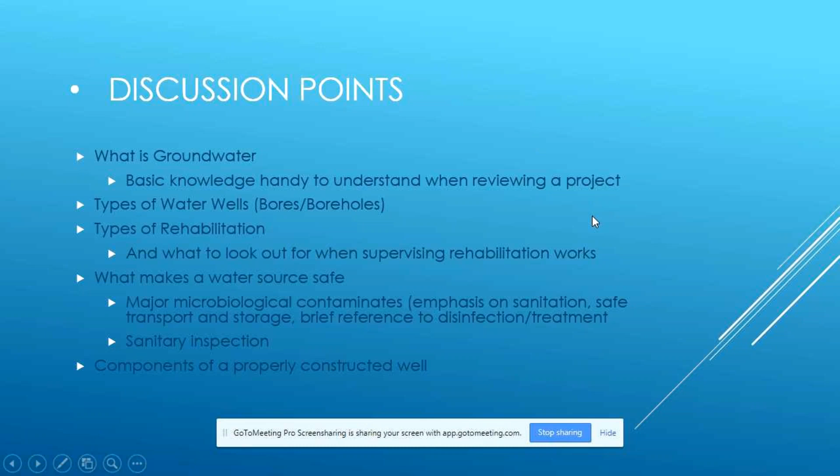Ooh, someone's microphone is on. Emily, should I still continue with that noise? Yes, please continue. Okay, all right. Sorry about that.

What is groundwater? Groundwater is a body of water that is found underground within the earth, in the cracks and spaces in the soil, sand, and rocks. Groundwater is stored in and moves slowly through porous soil, sand, and rocks called aquifers. An aquifer is typically made up of gravel, sand, sandstone, or fractured rocks.

The water moves from the surface through the spaces that make them permeable. The speed in which the water moves and groundwater flows depends on the size of the spaces in the soils or the rocks and the connectivity of these spaces.

I may have missed out something. And with the replenishment as well, or the groundwater recharge, which can be done by the rain or melting snows that seeps from the surface of the land into the groundwater.

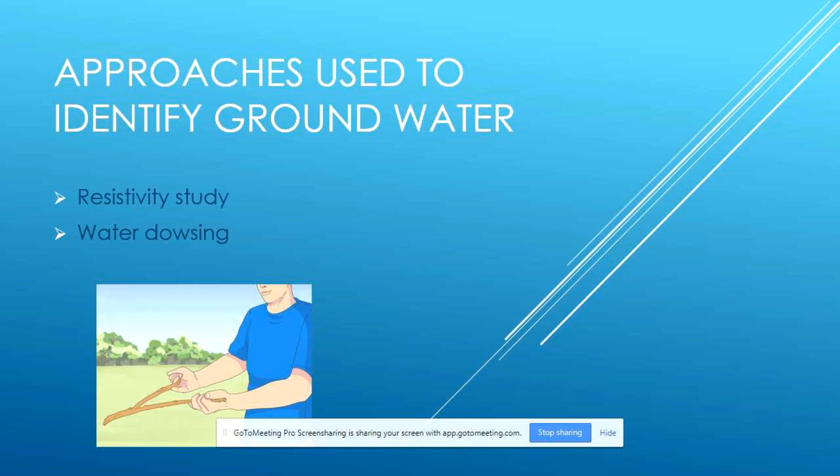And especially when we are using the resistivity study, Sahara, probably you can switch to the next slide. When we do a resistivity study, basically we will probably determine that we are going to do a tube well or a bore well, right? And through the resistivity study, we will get to know the depth of the well.

And therefore, while drilling, it's very important for us to record what type of drilling we are doing, the time and the date we finish, the overburden, the geology of the area, and the type of sand, mud, or rock that we begin to observe while drilling, because these things are very important. In Sri Lanka, all this data is sent to the National Water Board, where they keep all this data for future reference, and then they will monitor these wells during drought seasons,

how the water table drops, and if there's no proper recharge, then there'll be limitations for the hand pumps that will be installed for these wells. So therefore, a drill log is very important, especially when you are going for a tube well, because that gives you a history of that tube well. Sometimes in projects we drill and we don't have proper data or details, and then we move on, and if another project comes where you need to rehabilitate those hand pumps after so many years, then no one has the data to see the depth of the well or what yield it has. And so this data is very important when we are extracting groundwater through a tube well.

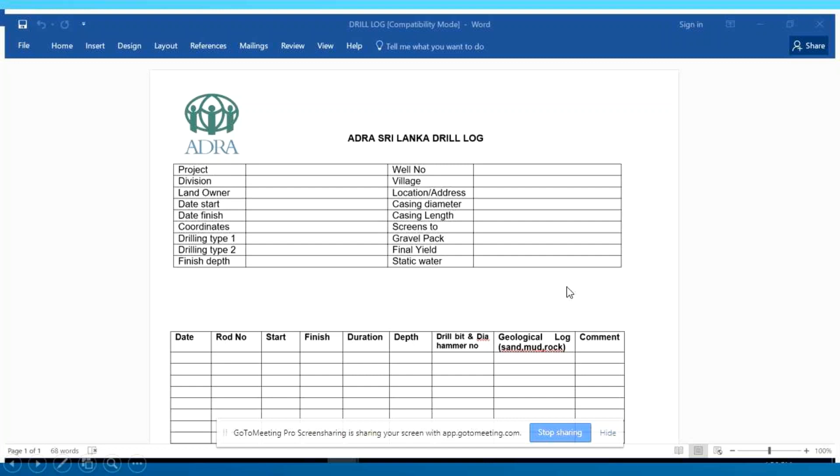Okay, there are types of water wells. First is what you find all around the world, the common dug wells, right? And most of these dug wells are not very expensive, but I know it's sometimes very tiring to do a dug well. But there is also a criteria that needs to be followed. For example, in Sri Lanka, we have a standard of between 40 to 50 feet if we are going to do a dug well, right? This is to make sure that there are no latrines or septic tanks close by, through which the water could get polluted, right?

And for this, of course, you don't need to have an electric pump, but depending on the location, situation, and your need, you can also have a centrifugal pump and an overhead tank, and it will be easy for you to use. And then the other type of wells are the driven wells.

This is where, in most places, you identify a location, and then with a very hard driven metal pole, or like in Sri Lanka, of course, we use PVC, 1000 type PVC, but I know in some other countries they use a screened or various type of GI pipes, and what they do is they hammer it into the ground until they get a reasonable amount of water, and then to extract that water, you will definitely need a pump.

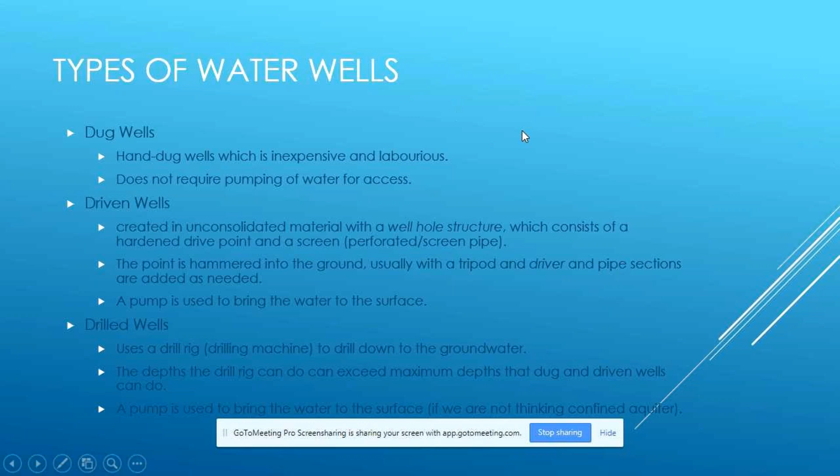In my experience here in the South Pacific, the majority of wells within the Pacific are drilled wells as well. And similarly with Sri Lanka, these drilled boreholes need to be at a certain radius from each other. It's a precautionary measure put there by the government and the departments of water, to make sure that people are not drilling bores wherever they feel like and over pumping from the same groundwater source.

With contamination of bores or wells, the well water may contain microorganisms and chemicals that will make you sick. Contaminated well water can cause nausea, diarrhea, vomiting, and potentially lead to serious health problems in the extremes, such as cancer, kidney disorders, and brain damage. Contaminants known as nitrates are especially hazardous for infants because they can disrupt oxygen flow into the blood of babies. Water quality of wells should be tested regularly for bacteria and nitrates.

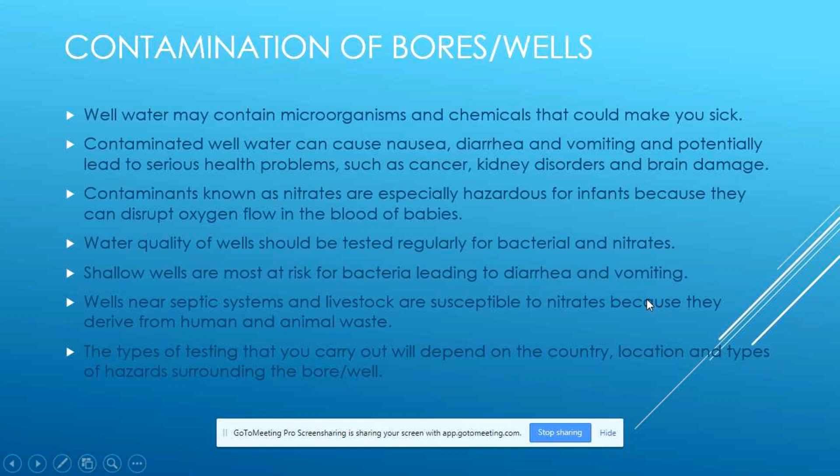And I realize different parts of the country and different countries have different time frames or frequencies in which water testing is done. So this should really be kept a close eye on to ensure that water quality testing is done on a regular basis. Shallow wells are most at risk for bacteria, leading to diarrhea and vomiting. Wells near septic systems and livestock are susceptible to nitrates because they derive from human and animal waste. And the types of testing you carry out will depend on the country, location, and types of hazards surrounding the bore and or the well.

What makes a water source safe? Now, there are various factors that contribute to making a water source safe, but we've selected 6 most important ones that we think play a vital part in this. The first one being the construction of the well or the bore, whether it be a new or a rehabilitated bore or well. This should be done properly. The location of the well, whether it's near farming areas or residential homes, toilets, septic tanks, and soak pits, and the likes of that.

The maintenance of the bore should be done on a regular basis as well, not just for the borehole, but also for its pumping mechanisms to ensure that the pumps are operating properly and at the drawing speed that they're supposed to.

The water source and the nature of the aquifer, again, avoiding the overpumping. Usually when a bore is drilled, there is a georesistivity study which measures the depth of the freshwater aquifer that we're trying to draw from the ground. And the pump testing, which is one of the primary tasks that must be done before the actual pump is put in, is very crucial in avoiding that overpumping.

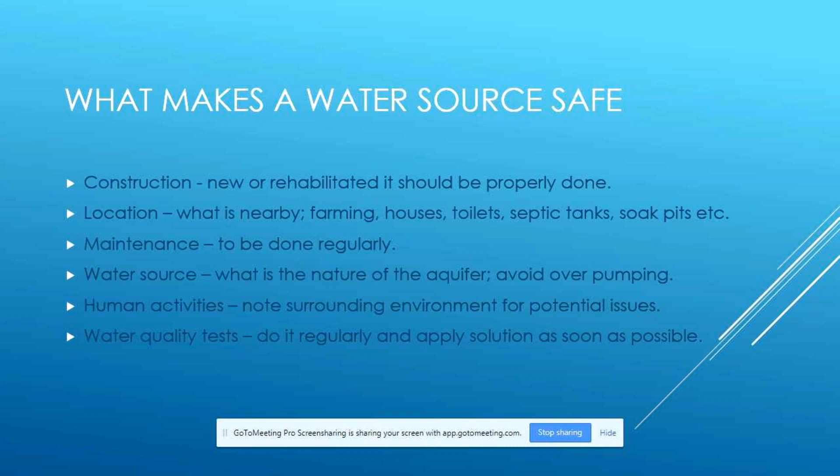Human activities: you must note your surrounding environment for potential issues. And again, with water quality tests, something to be done regularly. For disinfection of water wells, the most common disinfection for wells can be done with chlorine. I can say this especially for the South Pacific, for its bores and the quality of water. It might differ from country to country.

It's easy to do disinfection in automated boreholes, again with the chlorine, but this is probably something we can go into detail about in our next webinar, when we start to go a little bit more technical than this. The most difficult disinfection is with a hand-dug well. The quality in a hand-dug well is often very poor due to the construction of the above-ground elements and unhygienic methods of collecting water. For example, the rope and bucket that may be used to collect water are often left on the ground and exposed to disease-causing pathogens.

There is often no sanitary seal in hand-dug wells, and the construction of the above-ground parts of the well does not provide adequate protection from intrusion of surface water and dirt. Because of the large diameter of the hand-dug well, it requires much more disinfection to ensure that the water quality is up to standards. For a hand-dug well, the disinfection is a daily thing. At a minimum, the well needs to be disinfected every week or two, and disinfection needs to be performed not only on the water in the well, but also on the well casing.

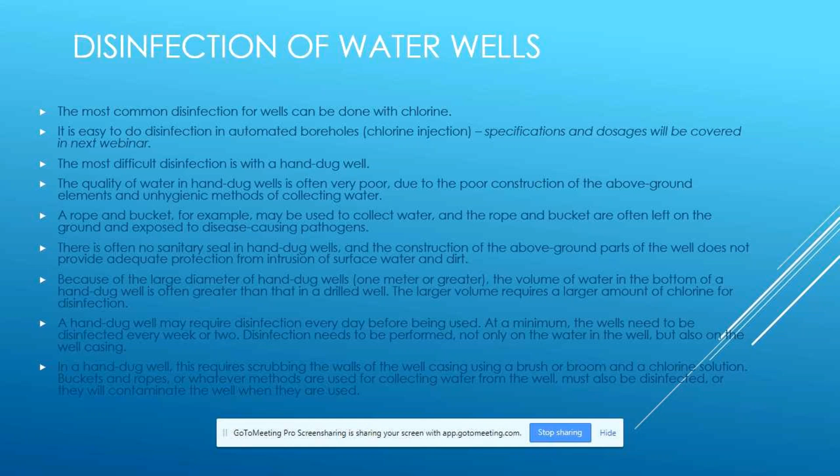Now, in a hand-dug well, this requires scrubbing the walls, the well casing, using a brush or a broom and a chlorine solution, and the buckets and ropes and whatever methods are used to collect the water. All of these things must be disinfected. So for a hand-dug well, not only is accessing groundwater very laborious, the disinfection process is quite laborious also.

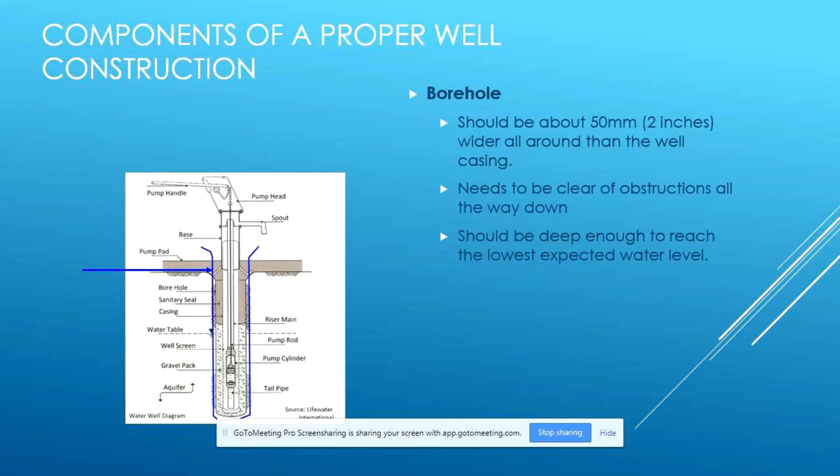Now we'll move on to components of properly constructing a water well. You'll be seeing the same diagram in the next few slides, but the difference will be the blue line that you see here, which demonstrates what I'm talking about. So borehole, for example, just looking at that blue line is what that word is referring to. The borehole should be about 50 mil or 2 inches wider all around than the well casing. This needs to be clear of obstructions all the way down. Sometimes when you're drilling, that's not necessarily the case, but again, something a bit more technical that we can cover in the next webinar. And a borehole should be deep enough to reach the lowest expected water level.

The casing, as you see, the line is now moving a bit inwards from the previous shade of a borehole. The casing lines the walls of bores, and it's often made of PVC pipe. If the borehole is 200 mil or 8 inches, then the well casing should be 2 inches smaller, that is around 100 mil. And this is probably applicable for most bores that I have experience with, where the casing is always 2 inches smaller than the bore diameter. The space between the wall and the casing is 2 inches or 50 mil, all around the casing from the bottom to the top of the bore.

The bottom of the well casing is capped and the lower section is slotted. The lower section here is either slotted or it has holes to permit water to pass into the casing.

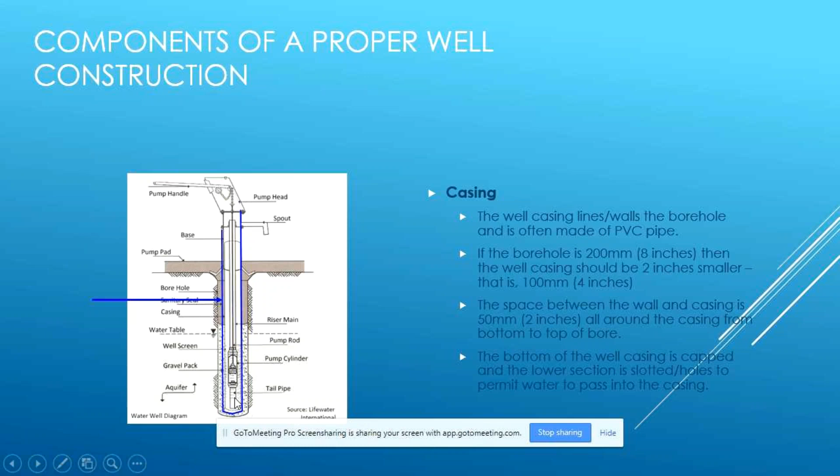The gravel pack, you will see the gravel pack around this area here. That's a coarse sand or a gravel which fills the 50 mil spacing between the well casing and the wall of the borehole. The filling of the space until it is around 1 meter above the pump screen, and the gravel pack allows water to flow from the aquifer into the well.

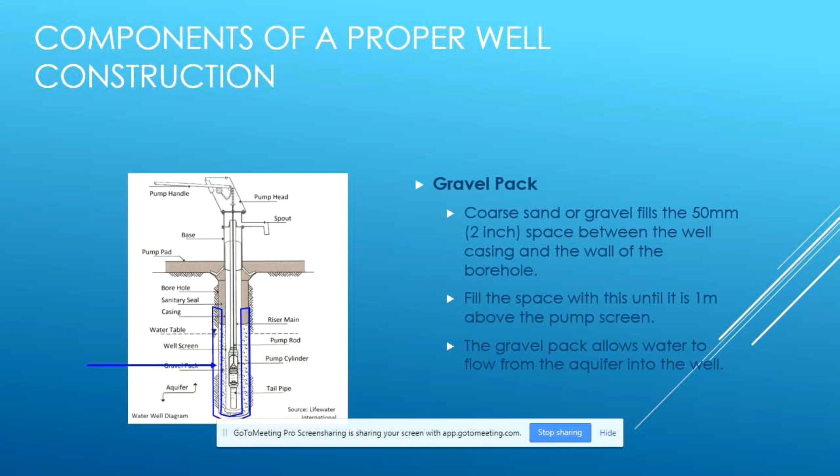For a pump pad, that's this solid gray color you see up here, is a sanitary seal, and the pump pad stops surface water from contaminating the well. The pump pad is made of concrete and should be thick enough and reinforced with rebar to keep it from cracking. Cracking would allow surface water to seep into the well, which then causes contamination, one of the many ways.

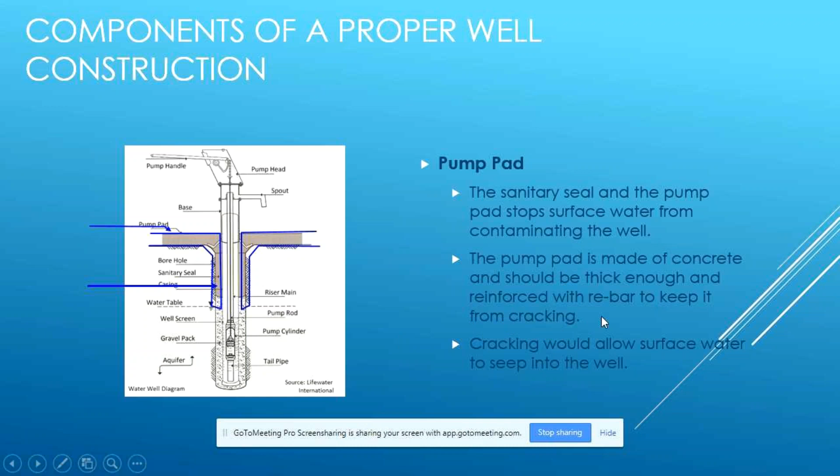The sanitary seal and the pump pad stop surface water from contaminating the well. Oh, this is probably a repeat of that with a couple more information. The pump pad is made of concrete and should be thick enough to reinforce that. Yes. The cracking would allow seepage into the well. Yes. And the sanitary seal is made out of slurry of bentonite clay and cement. So you can already tell from the contents of which it's constructed that it's quite a solid structure.

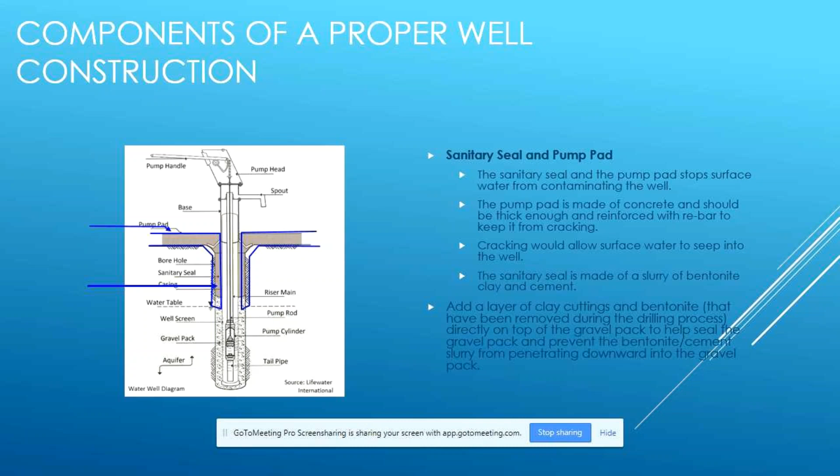Add a layer of clay cuttings and bentonite that have been removed during the drilling process directly on top of the gravel to help seal the gravel pack. Well, this is basically the additional layers that you can put on top of the pump pad when it's finished. Because when you're drilling, you've got pieces of your cuttings that come out from the ground as you're drilling down towards your groundwater. So basically what it's saying is to use those cuttings to layer the top part of that pump pad. And the concept of it all is to really try and stop the outside water or any contamination from entering the bore.

I'll hand it now to Wernher again to give a brief explanation of this. Yes. Hi team once again. Thanks Sarah for that explanation.

You have seen the construction of a hand pump mounted on a tube well. Well, it's not rocket science, but these are projects that usually face a lot of difficulties around the world. The International Institute for Environment and Development says that almost $360 million has been spent on building boreholes, and as a result, you see almost 50,000 water supply points in Africa are not functioning. Even in Sri Lanka, we have thousands of hand pumps that are not functioning because some people think it's very technical. Some project managers think, oh, it's too technical, we can't handle it. But it's not rocket science. It's very easy. The fact is we need to set up systems and methods.

One thing that we follow in Sri Lanka, and probably other countries in Africa and India and Bangladesh also might be doing it, is we form a water consumer committee right after the borewell is done. And then we give them a training as to how they need to remove the components of the pump, for example, the bucket washer and the foot valves. We also give them spare parts, a 2-year repair kit. And then on and off, we monitor them till the end of the project. And we have found out that a lot of people are engaged in repairing their own pumps.

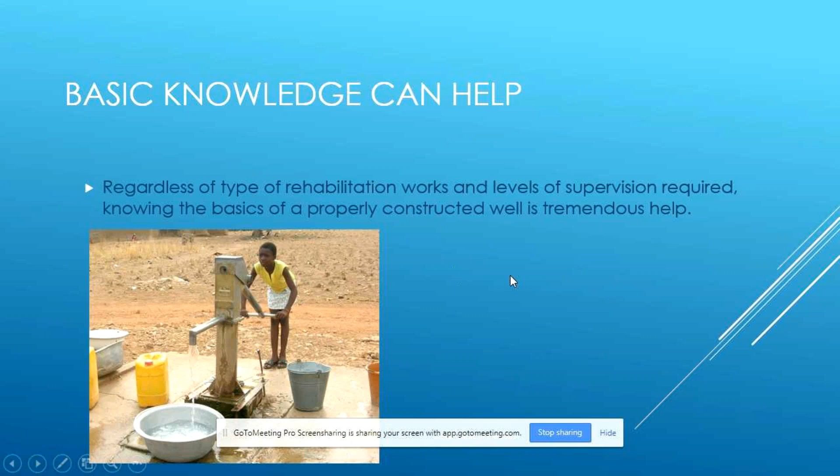I think this is one photo of a hand pump with a huge apron, but I would like to show in the next slide the type of hand pumps that ADRA Sri Lanka is constructing. You will see that we don't install the pump right in the center of the apron. We have brought it to the left corner, depending on the location, or we can shift it to the right corner of the apron, and you can see around the apron there's ample space for people to do their washing and their bathing and so forth. Initially, a lot of NGOs and private companies put the hand pump right in the center of the apron, and there's no space for people to move around.

But with this, we just did some thinking, and we thought, okay, let's put it into one corner so people will have enough space, because the aprons are not that big. And then we have a 6-foot drain plus a soak pit. And through the soak pit, we see that there are a lot of advantages as well, and also disadvantages. When we speak about the vector control, I'll give you more information on that. And Sarah, shall we go to the next slide?

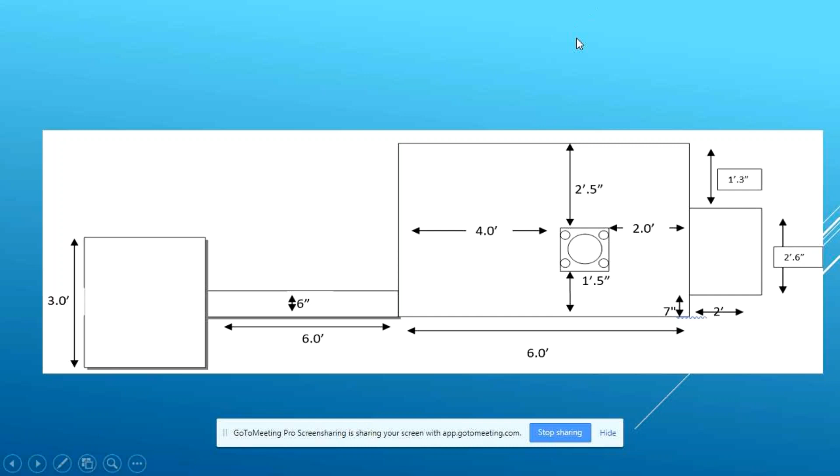Okay, something that we are working very closely with the Sri Lankan government on is, as I mentioned to you earlier, Sri Lanka is facing in the North Central and in Uva province a lot of patients with chronic kidney disease, and it goes as CKDU. U means unknown, because now the government is trying to find out, is it because of water and so forth. So what the government is doing is they are also mapping all the water points in Sri Lanka, and the most common case in Sri Lanka is hard water.

So during the drought season, sometimes the mineral content in your water varies, and then during the rainy season it varies. So it's good if you can test your water every 6 months, and to see that the people or the beneficiaries living at that particular water point get proper and good water. Let's go to the next slide, Sahara.

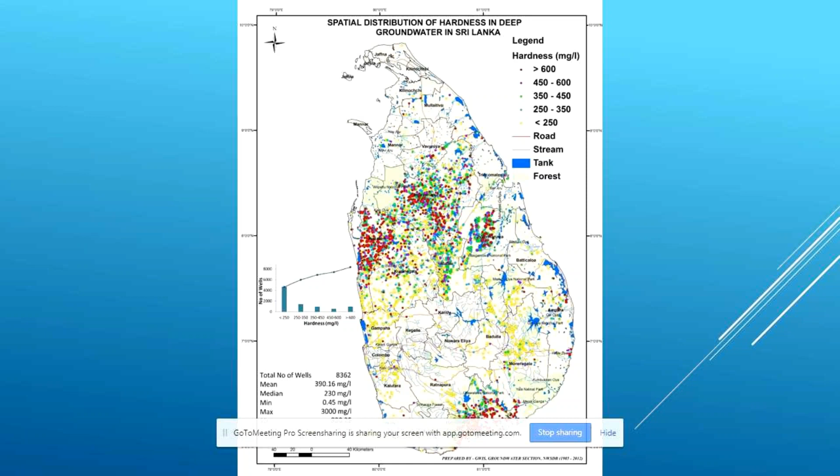And then probably the next slide is about water points and vector control. I think this is one of the biggest issues faced everywhere because of dengue and malaria and so forth. But in Sri Lanka, we have a lot of dengue cases because of stagnant water. So what we have thought of improvising in our aprons is having bigger and deeper soak pits. Because usually most soak pits are around 2.5 to 3 feet deep, but this just gets flooded due to rain or something like that. And so we thought of having bigger and deeper soak pits, and then also having a longer drainage but without a soak pit.

And probably one thing that we have experimented with is having people plant vegetables or fruit trees or whatever from the water that is coming away from the hand pump after use, right? So there are various ways, but you can't have 100% control of the vector, but there are ways where you can minimize it.

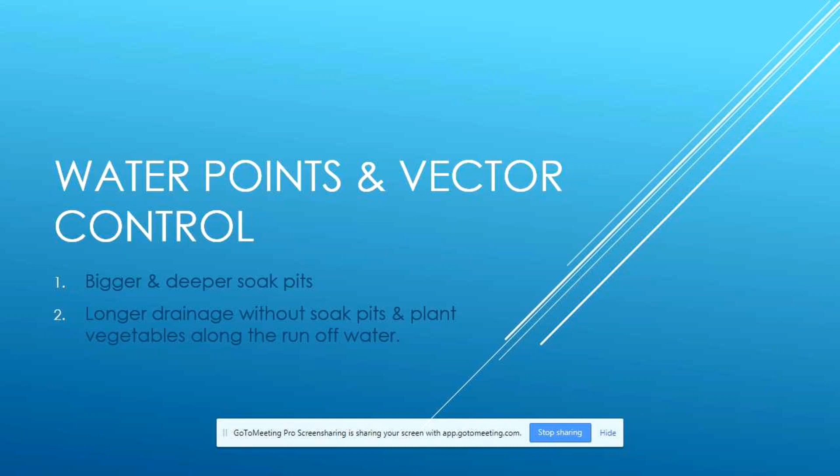So these are two areas where we have thought that if we employ a system like this, it will be better. But I think point number 2, longer drainage, is something where we have been successful, because the soak pits anyhow will get stagnant, and the water will just start flowing out of the drains and would return back into the apron. So now most of our hand pumps, as I mentioned, just have a long drainage, and then we tell the beneficiaries they can plant vegetables or whatever, and then the water doesn't get stagnant. Let's go to the next slide. Probably that would be our last slide before the questions are answered.

And I know a lot of officers have a lot of challenges. One is because of low government effectiveness. There's no cooperation with the government, and then the NGOs are left to find their own way of dealing with water-related issues, and then also the weak private sector, right? But as of late, the Sri Lankan private sector has shown some interest in putting up tube wells and getting tube wells renovated for the beneficiaries. I'm not sure as to how it's happening in other parts of the country or the world.

And then also conflict and violence. This is also a big challenge that most of the country officers face for WASH projects. And then natural hazards and environmental risks. For example, some of our tube wells that we did in the eastern part are prone to flooding. And when there's flooding, the water can get into the water pump. So what we do is we analyze those areas, we study the topography and pump history and the history of the area.

And what we do is we basically raise the hand pump on a platform, maybe around 3 or 4 feet high, and then there's less risk for the hand pump to get contaminated.

And then also another challenge that I see is the lack of confidence in country officers. Most of them think, okay, we don't have WASH expertise, we don't know how to do this, we don't know how to do that. But the fact is, in the network itself, I think there are a lot of people who can support even by a call.

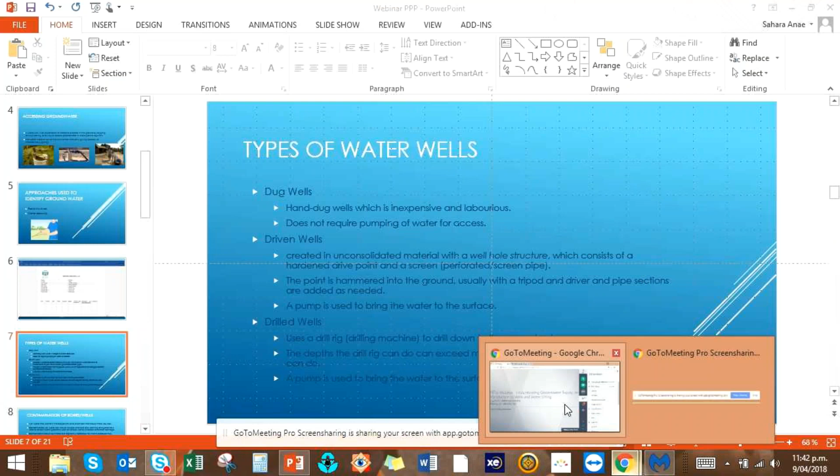So we got a few questions in the chat box. We have 3 to start, and I'll just go from the first one down. The first question is, what kind of method do you use for resistivity analysis?

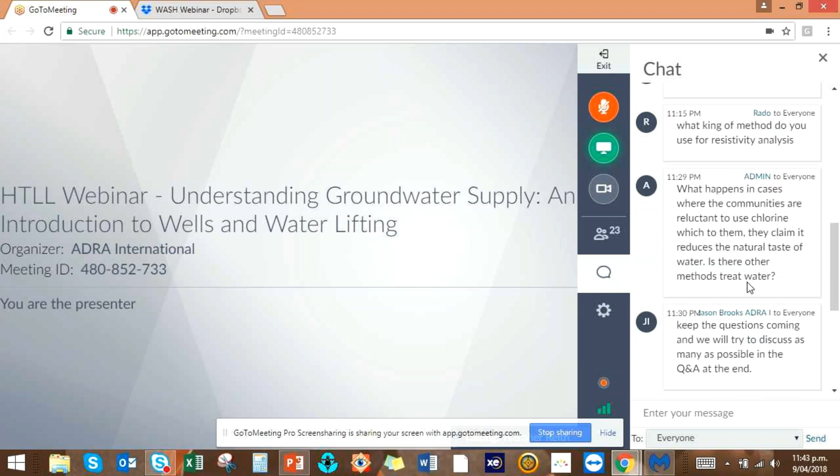Yeah, okay. The instrument that we are using is imported from India, and we use the resistivity method. We have 5 electrodes, and we pass electricity, as I mentioned earlier, around 40 to 50 volts, and we get a particular reading on our machine. We are using a very basic machine, so we need to calculate this and draw the graphs. Based on the graphs, we are able to determine whether that particular location has good water, whether the water is enough, or whether the water is saline.

So there are various models of resistivity meters. Depending on your budget, you can go to some of these very expensive European models. But according to our budget constraints, we have imported an Indian one, which is good enough, and it serves our purpose.

Hello. Great, thanks. I'll go to the second question now. What happens in cases where the communities are reluctant to use chlorine, which they claim reduces the natural taste of water? Are there other methods to treat water? Sahara, you'd like to answer that?

Well, I can speak from the South Pacific experience, and there have been a few communities, especially rural communities, that did not like the water to be chlorinated, although we've provided numerous trainings on why it was important to do so. In cases like that, if the community persists that they do not want chlorinated water, what we will normally do is reduce the dosage of chlorine so that it helps somewhat with the disinfection process, but to the point where we think the communities won't be able to smell the chlorine when they are consuming this water.